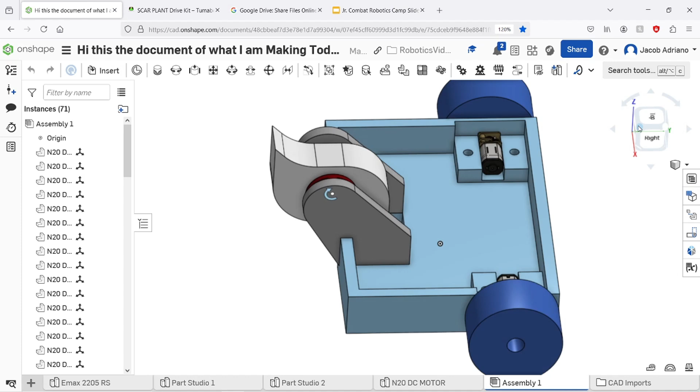Okay, welcome back. Now we are going to start making our front end. The reason why the front end is split up into a different video is because what you choose to put on the front of your robot can dictate a lot of stuff on how well it's going to fare against other robots. To demonstrate this, I'm going to pull up MS Paint.

Ooh, you're going to see a lot of really bad drawing by me today. But I'm going to show you like a little rock, paper, scissors chart, but for forks, wedges, horizontal spinners, and vertical spinners. So let's go draw that right now. We're going to see how badly I can draw stuff.

So, okay, this is wedges, verts. Okay, so typically when you run a vertical spinner, a lot of people just typically only run forks with them. This is for a couple reasons. When you have the forks, it helps you control the opponent, but also they're really good at getting under wedges.

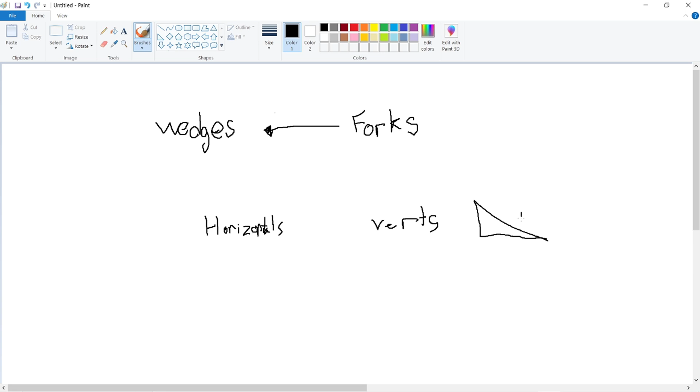So, forks beat wedges. I'm going to draw an arrow indicating that. Now, what are the wedges good for? The wedges are good for deflecting damage, not from a vertical spinner because that would hit them upwards, but for sideways hitting damage. So if you can imagine a wedge at an angle like this, a horizontal spinner came at them like this. This is like the bar of a horizontal spinner, if you can imagine that. This spinning bar will get deflected by this wedge. So the wedge is really good against horizontals.

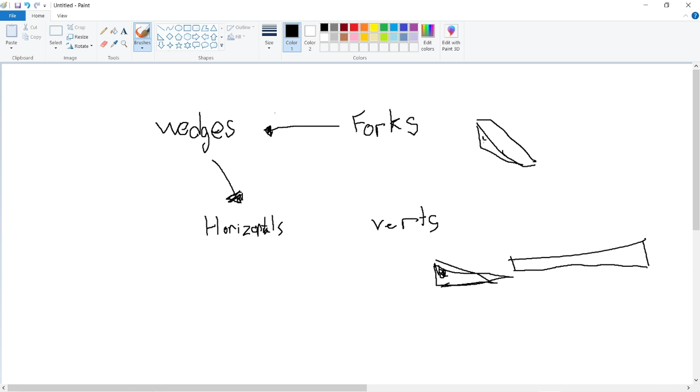So, but a horizontal spinner, if you can imagine that horizontal spinning bar again, do you know what is good against hitting? Forks, because they're dinky little, they're just little forks. That's all they are. They're pretty small, relatively thin, only mounted by like two little things on either side. The horizontal will smack the forks out of the way, so the horizontal is really good against forks.

You can see the vert is kind of kicked out of this triangle here, and I'll explain why. It's because the verts can run wedges or forks. Horizontals, people usually don't run either, not wedge nor forks. But a vert can put a lot of stuff in that front end. Let's say if you're running a vert with forks, you can be really good at beating robots with wedges on them, or other verts. If you're running a vert with a wedge, you can be really good at beating horizontals.

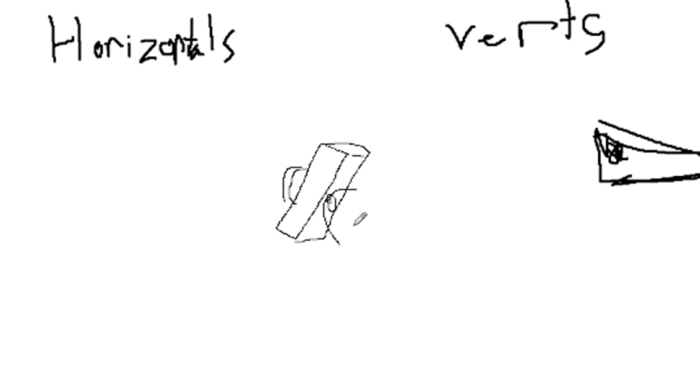So I like verts because it gives you that added layer of creativity to the weapon, because the weapon would be like in the front of the robot like this. You can imagine that's the vert. You can put whatever you want here. For example, you can put forks, or you can put a big wedge.

So it's pretty versatile. I'm gonna go over making a fixed front end. I don't know how much time it's gonna take to go over making a modular front end for the robot. But that is something I will go over in the future. But for this, just the basics, we're gonna go over a fixed front end.

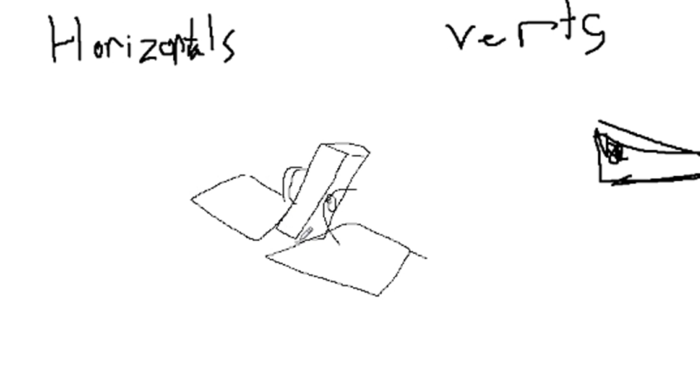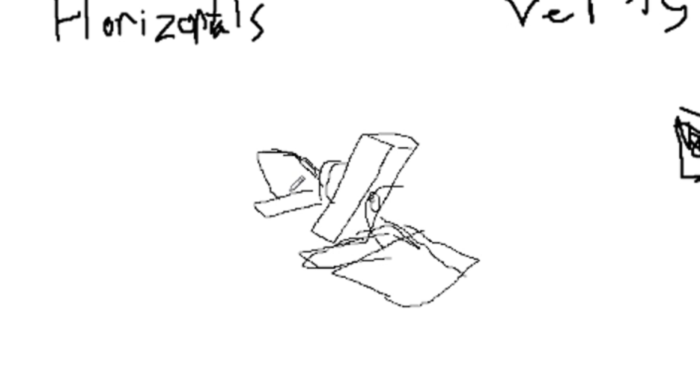And the front end will look something like, hold on. Okay, not exactly like this, but kind of a mix of both. If I were to run a fixed front end setup, where I can't replace it, I would run a mix of both with tiny forks in the front and then wedges that span out to the sides. And that's what I'm going to show how to do.

So, to go over that again, horizontals beat forks, forks beat wedges, wedges beat horizontals. Verts are good because since there's so much open space on the front of the robot, also where the weapon is, you can put forks on there too, and you can also put wedges on there. So it's kind of a modular thing, and you can choose what you want to do.

Little side tip though, if you're designing a horizontal, what some people are doing nowadays, and what I encourage more people who make horizontal spinners should do, is throw wedges on the back, throw forks on the back. Who's saying you can't put a front end on your horizontal? Just put it on the back. So yeah, I'm gonna go over that when we make a horizontal later in this video class, but that's at a later time.

So let's go make this vertical spinner. Okay, so let's start with the little wedge piece. In order to do that, let's head back to the Part Studio because that's where we actually edit everything. And then we're going to make a sketch on the side of this chassis. So we're going to click sketch, click the side here, and you see it pulls this up.

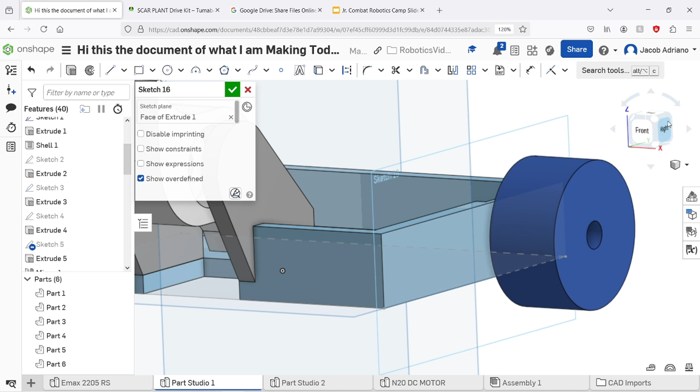Now, with this as a reference, we can start drawing out our wedge. So what should the wedge look like? I'm thinking it should stick out maybe 2 inches. Click and press 2.

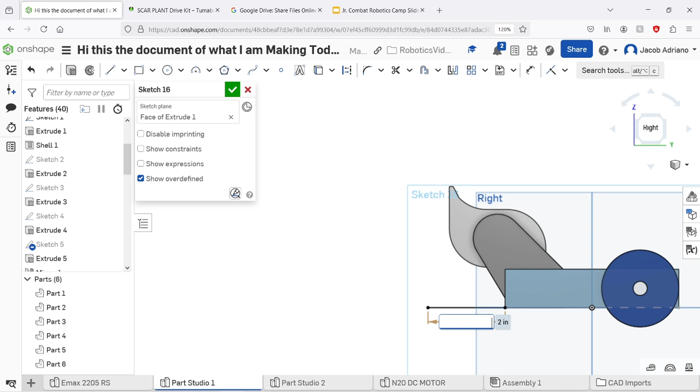Actually a little bit less. When I make my wedges, I don't like them sticking out too far. I like having the weapon stick out a little further. That's a little bit subjective, it's kind of up to you. I like having my weapon stick out more. It kind of guarantees I have a better impact when I hit the opponent, and I don't have to rely on getting the opponent over my wedge before I can hit them with the weapon. When I have the weapon sticking out more, it gives me a better chance of actually hitting them.

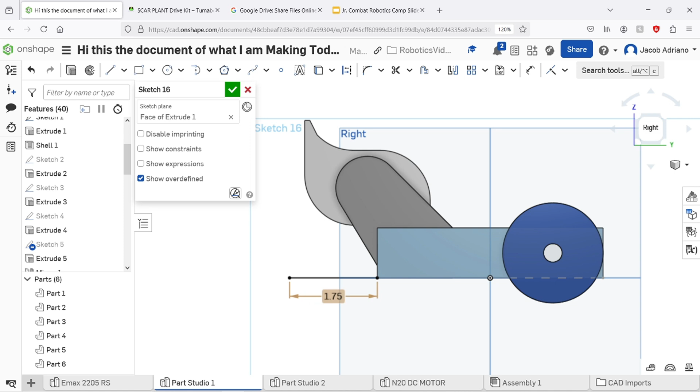So I'm gonna have my wedge only stick out, maybe 1.5 inches. Actually, even less. 1.25. Maybe less? No, 1.25 is good.

Okay, now that I have that, I'm just gonna complete the triangle so I have a rough idea of what the wedge would look like. Yeah, I'm not really liking that, so we're gonna go adjust that a little bit.

For this portion, it's partly by feel and partly by experience. All of the stuff that is more experience-wise, I'm gonna explain to you exactly why I'm doing it. All the stuff that isn't really experience, I'm not explaining what I'm doing, because you can do it yourself. Go ahead, have a little fun. It is your robot after all.

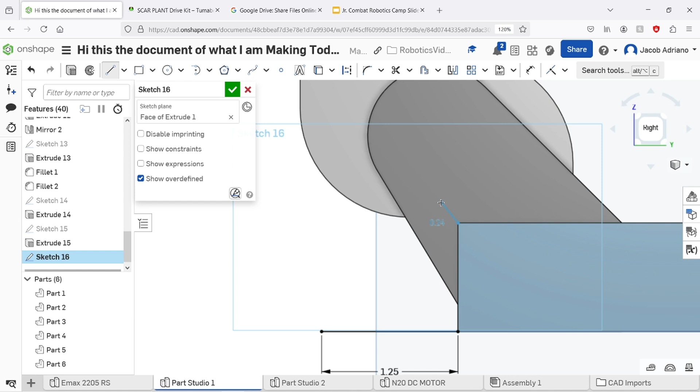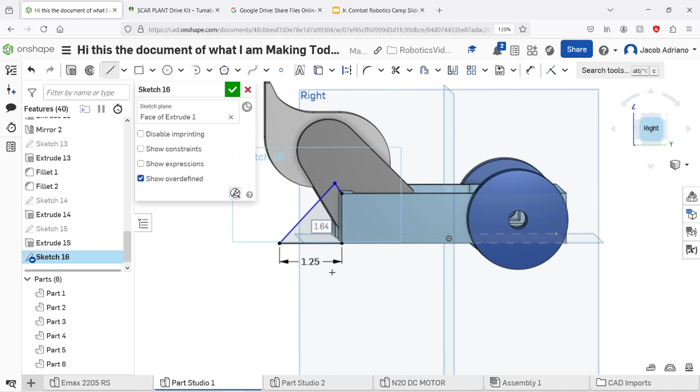So I am making this wedge a little bit higher than the actual chassis itself. There is an actual reason for that - it's because I don't want a horizontal spinner. Let's say a horizontal spinner comes and hits this weapon or hits the wedge. If it hits the wedge, there's a chance it could go right up the wedge and then go to the top plate. I don't want that, so I'm gonna make sure my wedge sticks up just ever so slightly so it doesn't ride up to the top of my robot.

I think that this is a decent enough shape. 0.3 inches at an angle that I don't remember, and then 1¼ inches out.

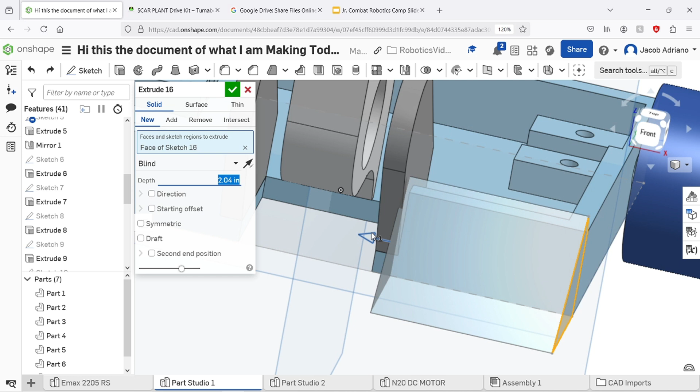So now that we have that, Shift E for extrude. I want it going this way, and then I want it to reach this end. I did it wrong. Hold on, I want it to go that far. That's 2 inches. Hit the check. There we go.

That's kind of a wedge thingy. Although I do believe that's a different part. I want that to be the same part. Merge scope, click part 1. There we go. That's the start of our little wedge.

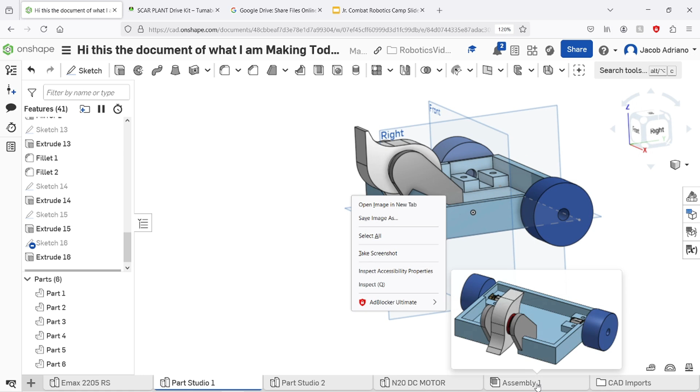Go back to the assembly so you can really see how the wedge would interact. Now that I'm seeing this, I think actually I can make the wedge stick out just a little bit farther.

So we can go back to edit sketch 16. And then I want to change this 1.25 to 1.5. Let's see how that changed the angle here. Did that even change? Oh, there it is.

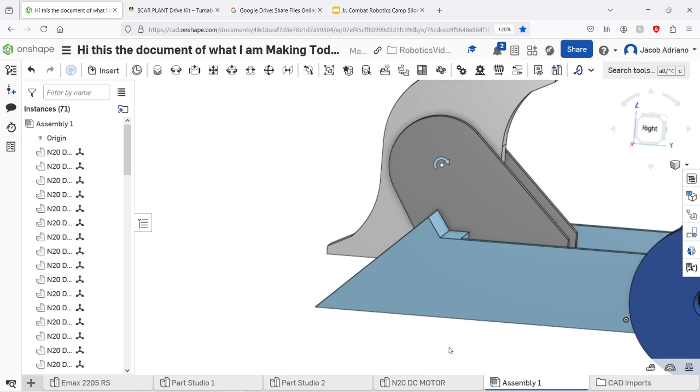I take it back, I think I'm thinking somewhere in the middle. So 1.35. Enter. That's better.

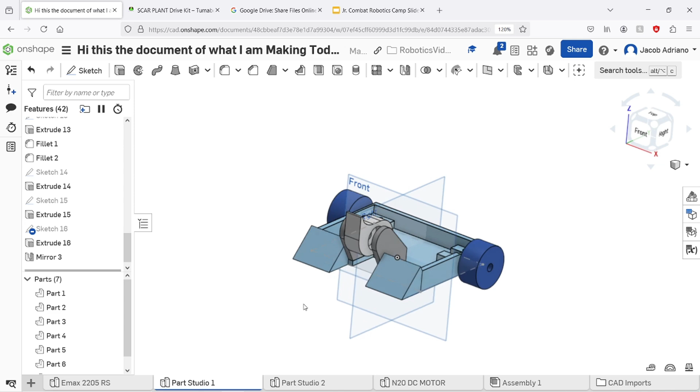Okay, now that we have that, let's go mirror that on the other side. Back to part Studio 1. Yes, this is good. And then let's go mirror this. So mirror, entities to mirror - we can just click the whole body, mirror plane, click the right one. There we go. This is pretty close to done already.

You can see this video won't be too long. Well, at least won't be the hour-long video that the last one was. So...

Yeah, now that we have some wedges, this looks pretty cool. We're gonna add some tiny forks now.

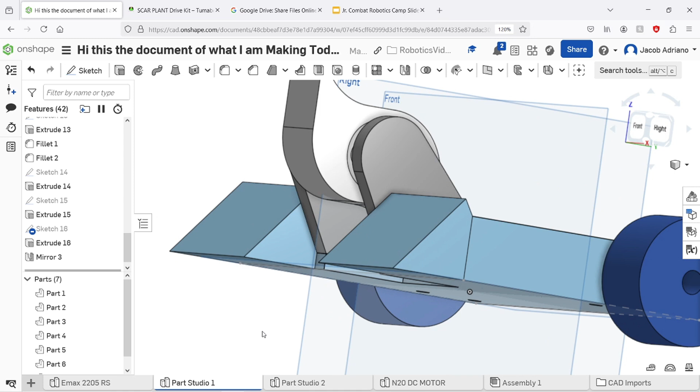Okay, so for the forks, there's two different forks you can make: fixed forks, which are forks that are fixed in place and can't move, or forks that can pivot, so movable forks.

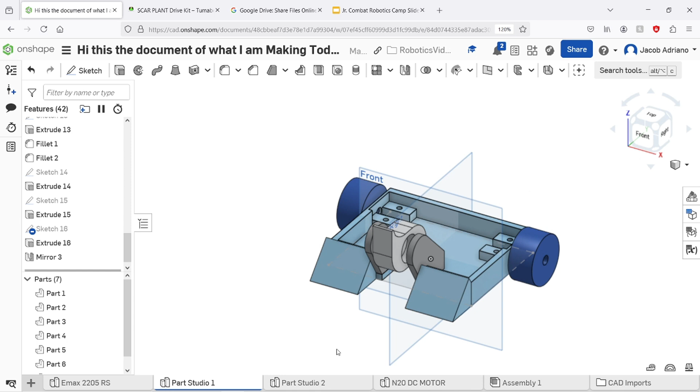Forks that can pivot are good because let's say a robot gets tilted up a little bit. Let's say my robot on an impact gets tilted like this, or I'm tilted forward like this. My forks will still be touching the ground because gravity keeps them pushing down. If the forks were fixed at an angle and my robot gets tilted like this, my forks will start pointing up because they're fixed in that position.

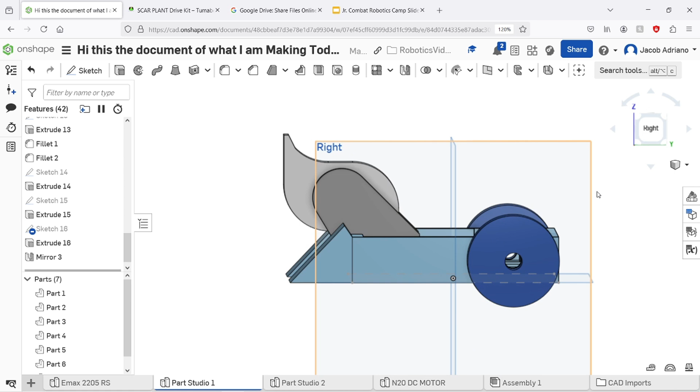That being said, fixed forks aren't always horrible. For two-wheel drive robots, you can ensure that one of the places that your robot is driving on is your forks, because obviously, with a robot like this, it's not going to balance perfectly. It's going to be at a bit of an angle when it's actually on the floor, if you can imagine that.

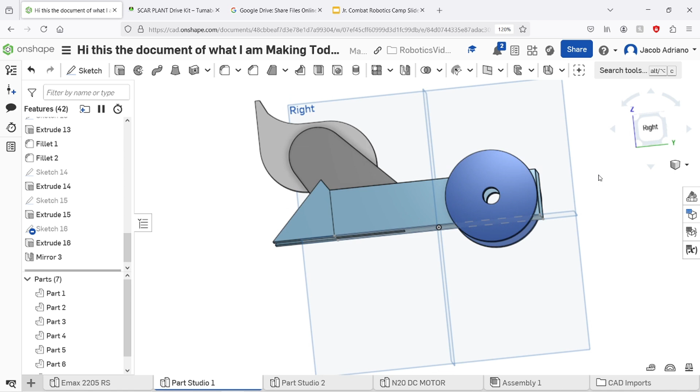It would touch, kind of like this. I can't get the angle perfect, but okay. It would touch here on the wheels, and then it would touch right here on the edge of this wedge. What you want it to be touching is on the forks, because you want your forks to be scraping the ground almost all the time, pretty much.

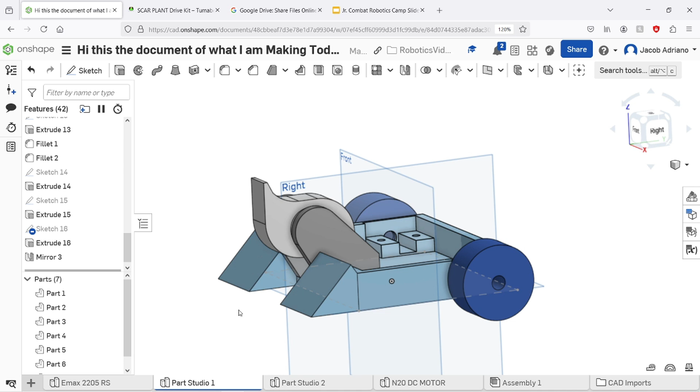So fixed forks aren't always bad. For two-wheel drive robots, you can make sure that it balances on your forks. That's how you ensure your forks always stay low to the ground. So we're going to make fixed forks for this robot.

And for these forks, we're going to have them mounted onto the uprights. So we're going to find where the uprights are. Extrude 2. Okay, we're going to go edit the sketch that your uprights are made on, and we're going to modify this so we can put some forks.

So where should we start? I'm thinking forks should go down like this and then go out farther than the wedges, so maybe 2 inches. 1.75 actually, 2 inches is a little much.

I like my forks, at least for this robot specifically—I don't want them to stick out too much because in plastic ant weights, the forks can snap pretty easily. So I don't like having forks that stick out too far. When I do run forks, they're either really thick or don't stick out too far to make sure they don't get damaged. For this robot, I just don't want them to stick out too far because I don't think I have enough room to make them thick enough.

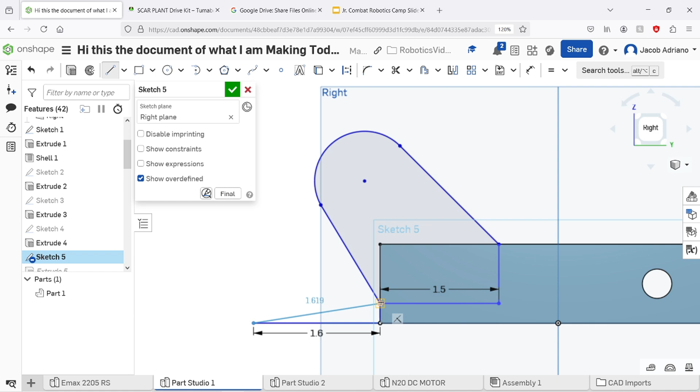1.6. And then from here, I'm going to add the fork angle. I'm going to do the angle by eye. I'm thinking... actually, I need to figure out where it stops first.

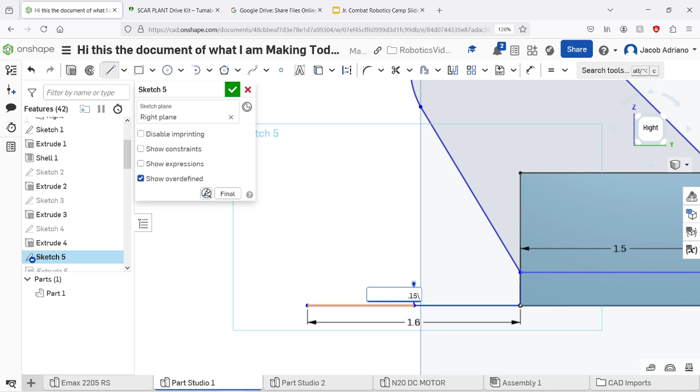I'm thinking right here in the middle of this 1.6, and then .15 going up from the center. Click here, you can see how that makes a triangle. I think that looks fine for the forks.

So with that being done, we can add a tangent point arc. Just go here, connect it here, click the check. Boom, that is our little fork. So let's go extrude it. Hit the check. There we go.

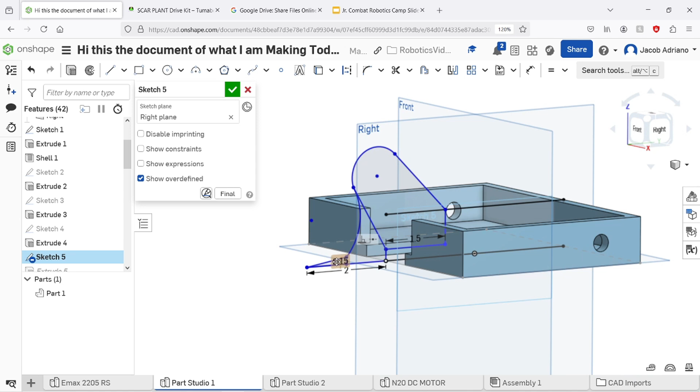Now you can see how that adds little forks, and we can make those a little longer. I think I didn't do enough, so 1.6—we're gonna do maybe 2, that's fine. And then I'm thinking that these forks are way too thin right now, so I'm gonna change this actually to 1.8.

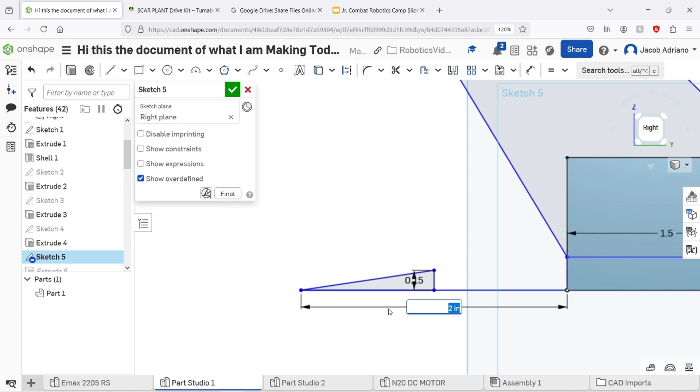And then change this—oh, stuff moved. Delete this. There we go. Now it changes to 1.8. So now we have this. This is pretty much almost done. Doesn't that look cool? That looks pretty dope if I do say so myself.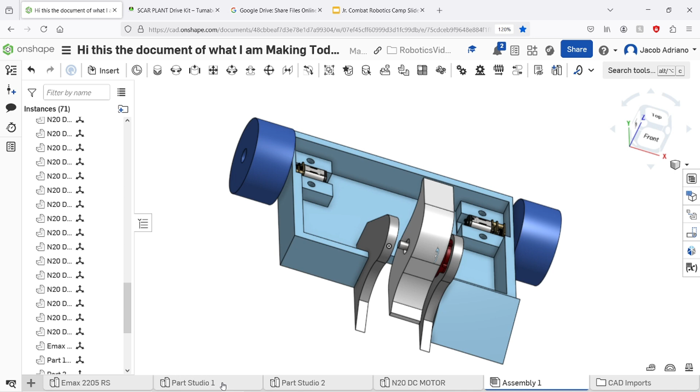We're gonna add a few final touches. Oh, interesting how this didn't copy over. Weird. Oh, because this is a different part. Make sure when you do your mirror, you set it to add instead of new. Merge scope, connect it with this. There we go, there we go.

Alright, we're going to add a couple more things. First of all, these wheels are pretty exposed. I'm going to make sure they don't get clipped as easily. In order to do that, we're gonna head back to Part Studio 1, and we're gonna go back to this sketch 16. We're gonna make some wheel guards.

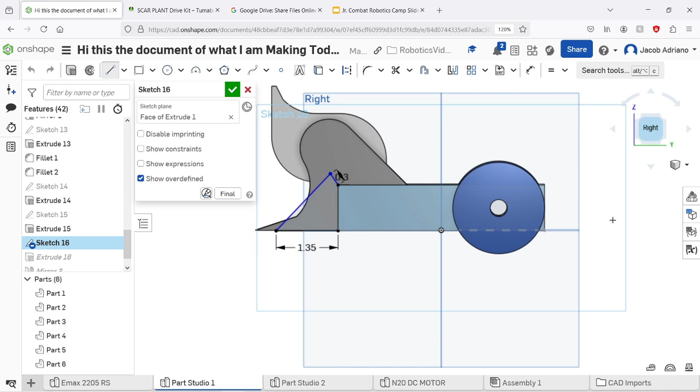Not wheel guards that go all the way around the wheel. I find that casing the wheel entirely, that's fine, but it can cause some other issues, just like, let's say, with maintenance—they often get snapped off pretty easily. I like having wheel guards to protect just the front of the wheel. So if you can imagine from a top view, kind of like a triangle like this.

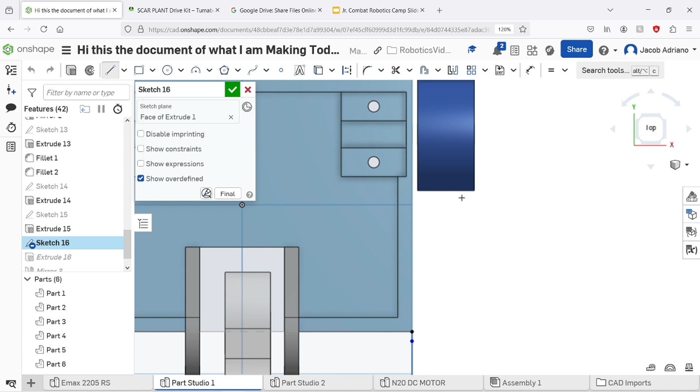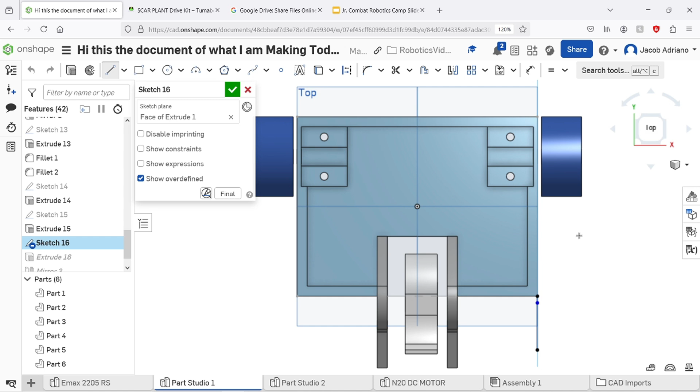Why do I not protect the entire wheel? I noticed that when I protect the entire wheel, this side part gets broken a lot, and I have to replace it a lot. It's often just extra spots for horizontals to hit instead of actually protecting anything. For me, this is totally personal preference. If you're not so great at driving or you're just new, I recommend encasing your entire wheel.

I'm not too bad at driving, I'd say. I'm pretty good at keeping the front of my robot facing the opponent, so I don't protect my wheels too much. But that's all personal preference - if you want to protect your wheels, go ahead and design that. I'm going to design some front wheel guards.

To start, I'm going to make some lines sticking out 2.25 inches on either side, which is also this midpoint. Then I'm going to use the 3-point arc tool, go from top to bottom, and make a little arc, kind of like this, at 0.8.

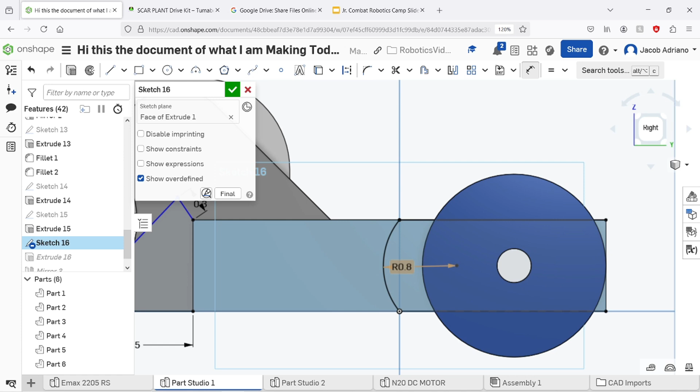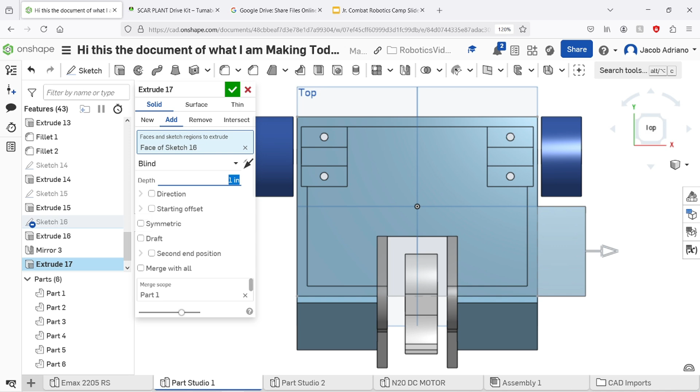From there we can extrude this whole thing. We're going to select this little rectangle, the part we traced out, Shift E for extrude. Now you can kind of see what we're doing here. Drag this out - I'm thinking 1.2. No, just 1 inch. Yeah, that's good.

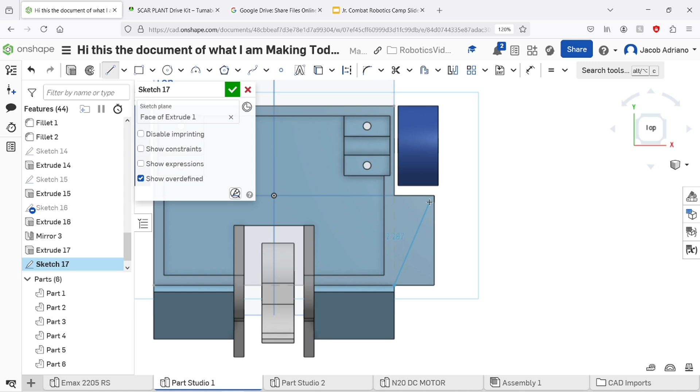This is just a box right now, but we're going to modify it. I'm thinking we'll add a sketch on top and trim it out, like negative space, like we're carving. So I'm going to add a line cutting this rectangle in half, then use Shift E for extrude, click remove, and remove all of that. Hit the check, there we go.

Now we just copy this over again - mirror, click the whole thing, make sure it's add instead of new. Mirror plane, hit the right plane, merge scope, click the chassis, hit the check. There we go, that is our armor in the front end.

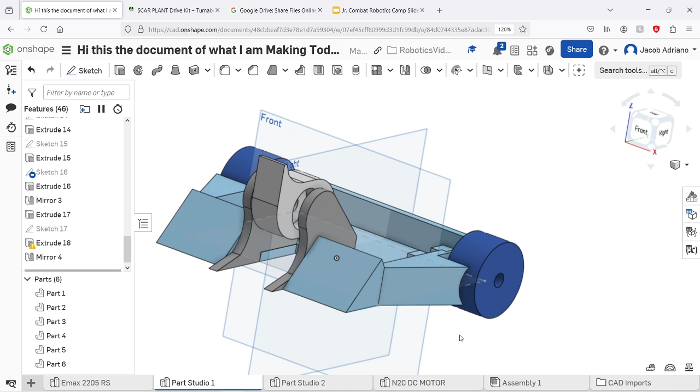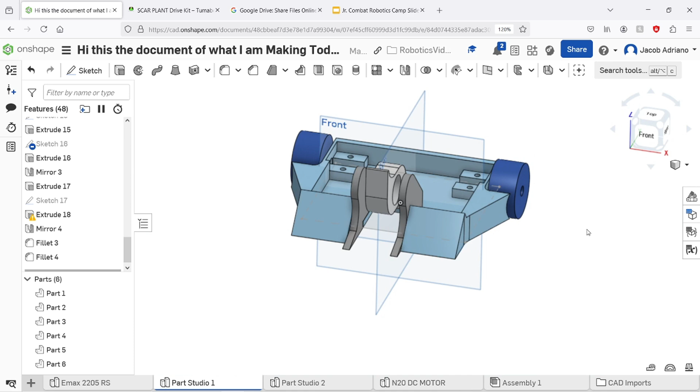I'm going to smooth it out a little bit with some fillets and stuff. Okay, so I just added a couple fillets here and here, and then I added some in the back as well. This is looking pretty good.

So we're almost done, but it is missing a few things that are pretty important for a robot - one of which is a top plate, and the other are mounting screws. We're going to go over that right now.

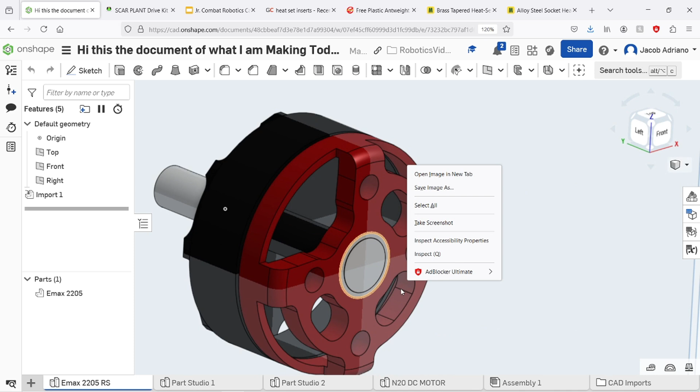Let's go add stuff to this robot so we can actually mount things to it. Let's start with the screws that will mount into the weapon motor. As you can see, there's nothing to hold this weapon motor on, but if we go to the weapon motor CAD, we can see 4 screw holes we need to make. Also, this little sensor needs a hole because the silver part actually spins and we don't want it interfering, so we're going to make a little hole here too.

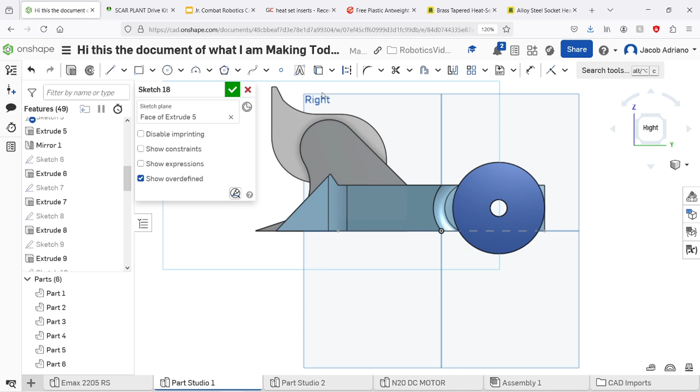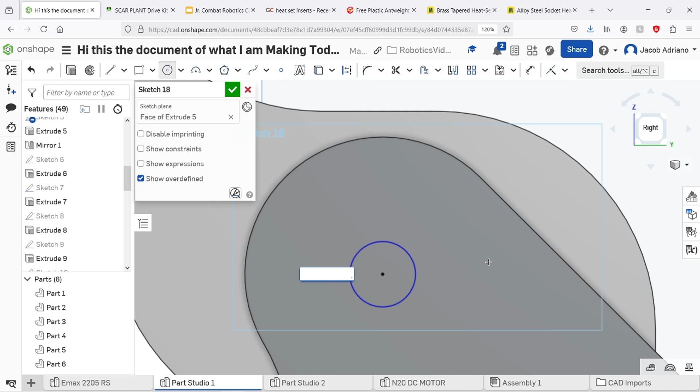Let's go to the CAD. Let's hit a sketch, and click this face right here because that's where the holes will be. Zoom in - actually we don't need to project this because it should already pop up. If you highlight around the middle of this circle, there should be an invisible dot. You can click it and make a circle. We're going to make it 0.25 inches big - actually, 0.2.

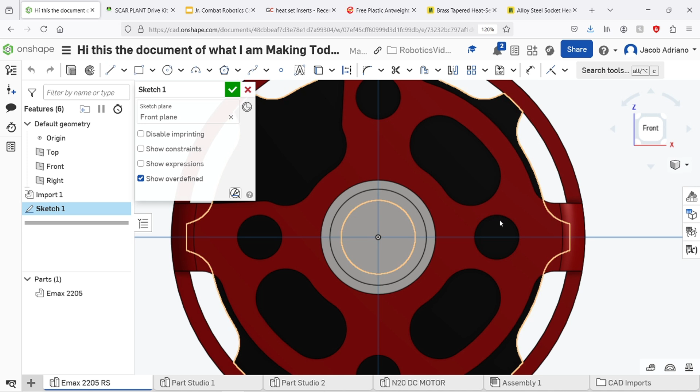Now, to know where the rest of the circles go for the mounting, let's look at this CAD. As you can see, we can see the 4 holes and measure exactly how far they are. Let's imagine taking a line - click sketch, click this face, and use a line tool to measure the whole distance of everything. For example, from the center to this hole, I'll have to project to this - actually, from the center to this hole is 0.315 inches. So over here I can make a line that goes 0.315 inches, and I know there's going to be a hole over here. Wrong tab - let's go back and check it for all the other sides.

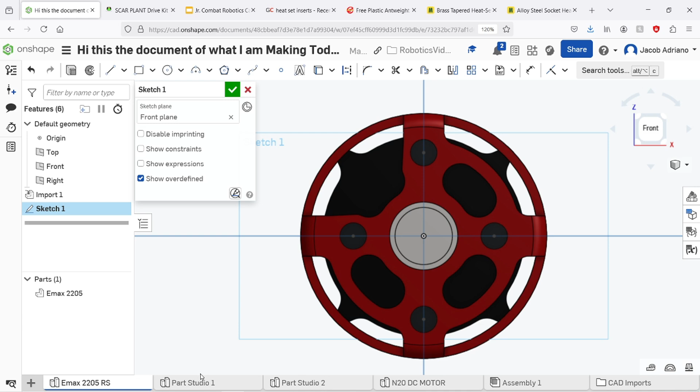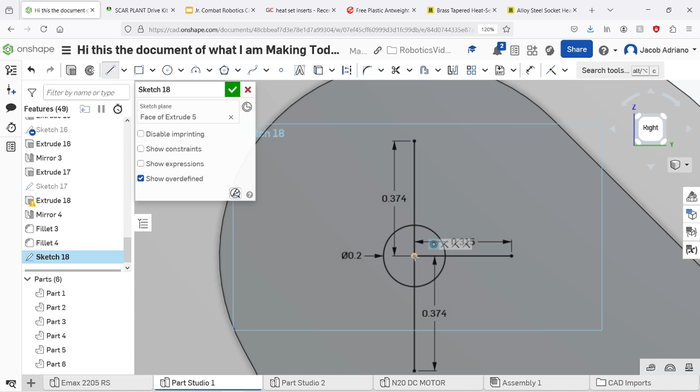First, let's project these circles so I can actually see them. There we go. This one is also 0.315. This is 0.374, and this one is also 0.374. So up and down we're going to use 0.374, 0.374, 0.374, and then left and right we're going to use 0.315, 0.315. Good, now we can just add the holes.

They can be like 3 millimeters. So type 3 mm, or 0.118 if you want to use imperial.

There, now we should have 4 holes like this. Looking back, this hole could actually be larger. Never mind, 0.2 is okay. Now we can extrude all of these. Change it to remove because we want to remove stuff, and yeah, looks good.

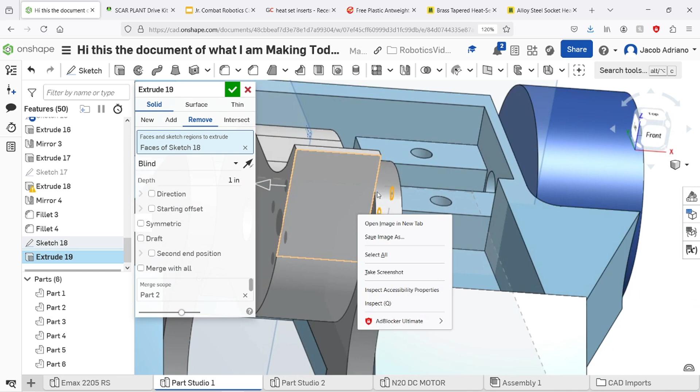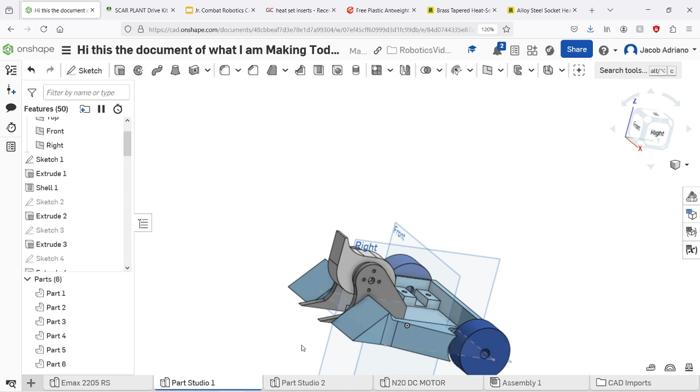So now we have that. Perfect. A few more things need holes though. For example, the top plates will need some holes. It also doesn't even have a top plate, so we're gonna have to add that after as well. And then these uprights will also need holes. So let's start with the top plate holes, or soon to be top plate holes.

So let's click the top of the robot, get a top view, and then we're gonna zoom in right here. You see these 4 corners? Well, we can't use these 4 corners because they are being occupied by the motor mounts. So we're gonna use the center instead. Click with a circle, and then we're gonna drag it out to the edge of the wall.

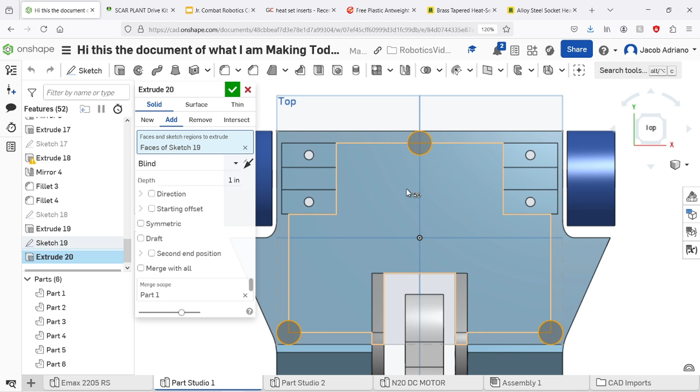I should make a ½ inch circle in the back. Over here, these circles will be, oh yeah, also ½ inch. Perfect. And then we can extrude those going down. Hit the check. Perfect. Now these will be the little spots where we can add our mounting.

Now for this robot, we are going to use something called heat set inserts. They look like this. You heat them up with a soldering iron or something else hot, and you push them in. If you don't have access to a soldering iron or something, you can use plastic screws, which are screws that form themselves into the plastic.

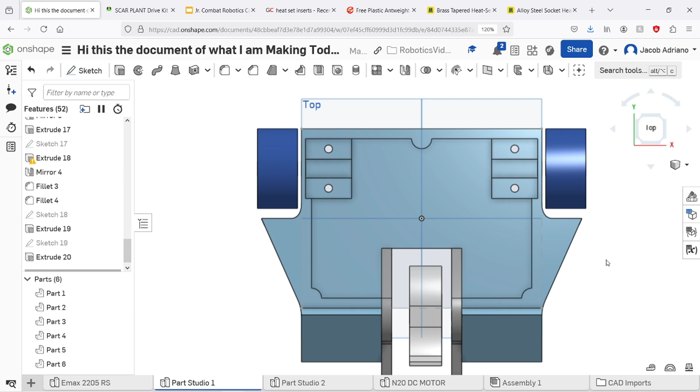I don't recommend them because after a while, those screws tend to just chew up the plastic, and in the long run, they don't hold. I like the heat set inserts because they have nice brass threads for the screws to tap into. They seem to hold better for me, although, I mean, if you don't have a soldering iron or something hot like that, what are you gonna do?

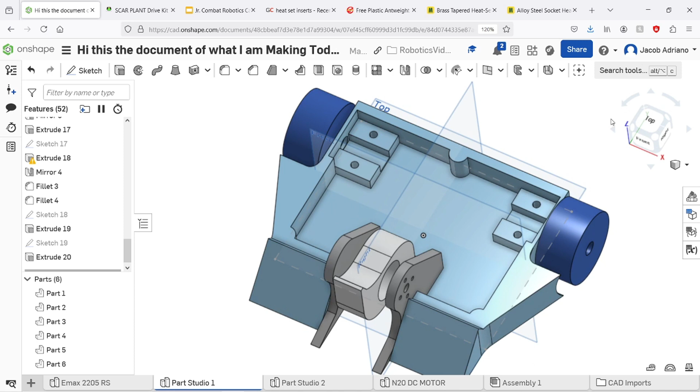Now, these heat set inserts are about 5 millimeters in width. About 5 millimeters. So we're gonna head to our CAD, go back to sketch 19, and then we're gonna make holes here that are 4.5 millimeters.

Now, why not 5 millimeters? We're not doing 5 millimeters because we need the grooves here to actually lock into something. It's nice to spec the holes a tiny bit smaller because it allows the heat set insert to really grab into the side of the wall. So instead of 5 millimeters, like the CAD says, we're going to do 4.5.

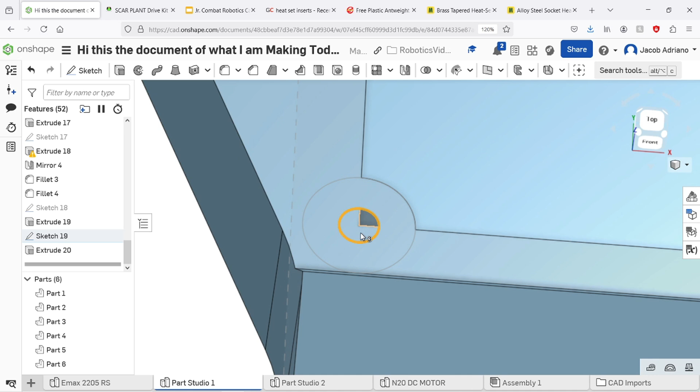Now that we have all 3 holes, we're going to press Shift E, and then we're going to select the holes that we made. Oops, what did I select? We're going to select all of these holes, and then we're going to press Shift E. There we go. From here, we can press Remove.

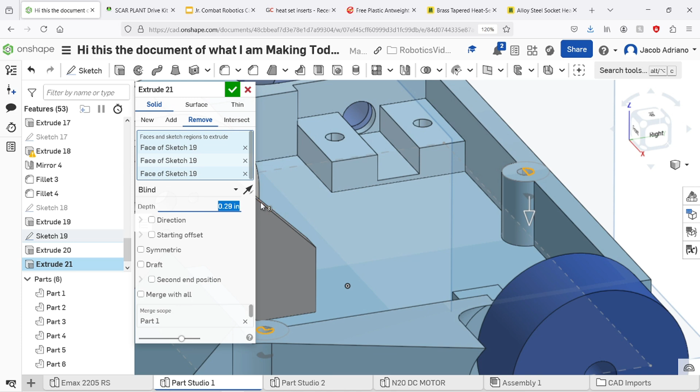And then we're going to carve out how much material. How much material are we going to carve out? Well, if we go to the CAD, we can see it's about 4 millimeters deep. But we also have to consider that the screw might go in a little more. So let's give it, let's say, 6 millimeters.

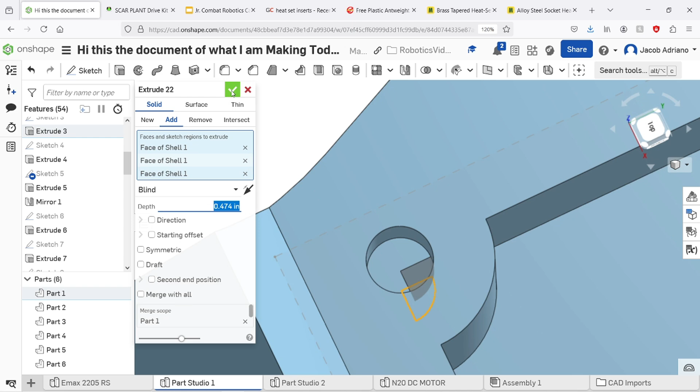Good. Now, as you can see, if we had this sketch, there's 2 different heights in there, so we're going to fix that with another extrude. Okay, so now they're the same height. I have a little artifact line. We're going to ignore that.

I had to extrude them 0.474 inches upward. Now we have top plate screws. There's one more thing we need to add now, and that is screws for the bottom of these uprights.

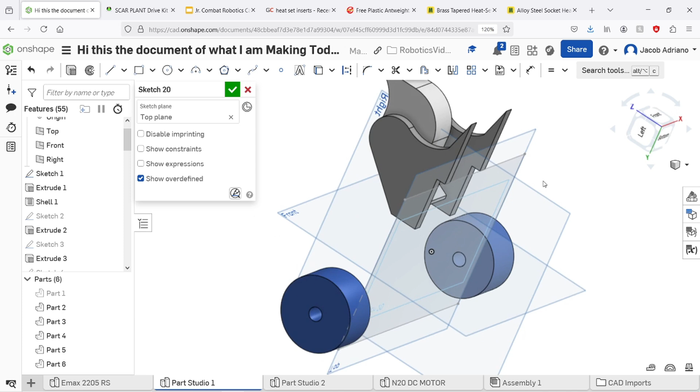For the upright screws, we're going to start by hiding the chassis. So part 1, we're going to hide it. And then we're going to make holes. Let's go click the sketch, and let's click the bottom plane. Or I guess top plane, but we're going to click the top plane. And then we're going to project, or U, all of these lines here. There we go. So now we have a bunch of lines of the uprights that we can use.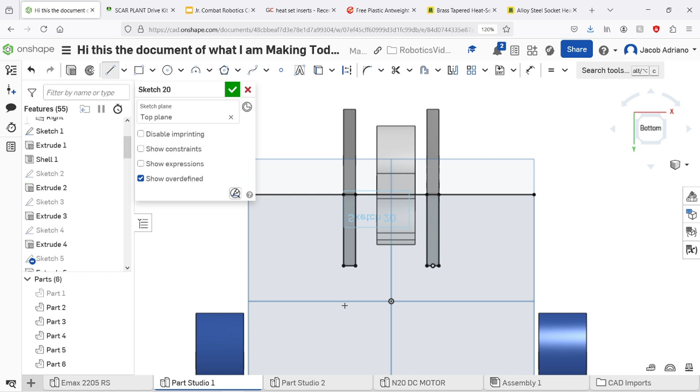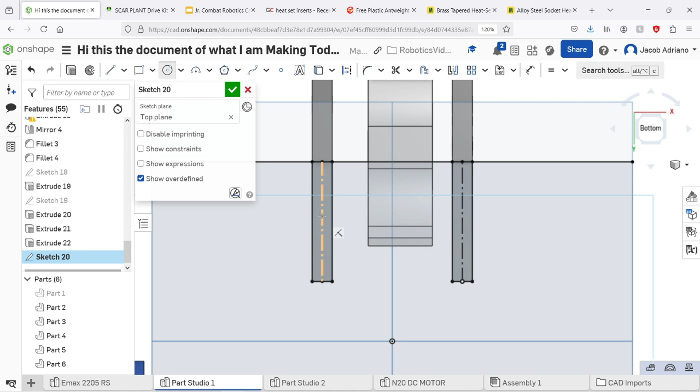So we're going to make one big line through the center of each upright, and these will be our guidelines. So we can change them to construction lines. Okay, now we gotta just put some screw holes. So I'm thinking we're gonna have 3 screw holes per upright. That sounds fine. Let's go to the midpoint of this upright, and then it's the same process.

So what was the size? 4.5 millimeters. Good. Now we're just gonna need to add more. So I'm thinking what looks about right. 0.45. 0.45 inches up from the center. I'm thinking another screw would be good over there.

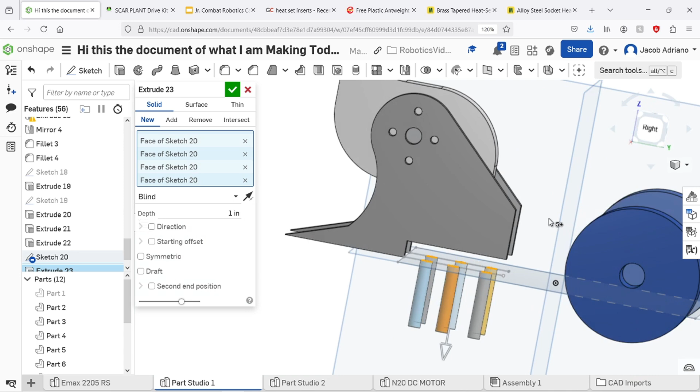And then we just repeat the same thing going down. Now that that's done, we can extrude these. Sorry, I had a little struggle selecting the holes that I wanted to actually extrude, but now that I have them selected, we're going to click remove. And then we're going to drag it up, let's say 0.75 inches. Merge scope.

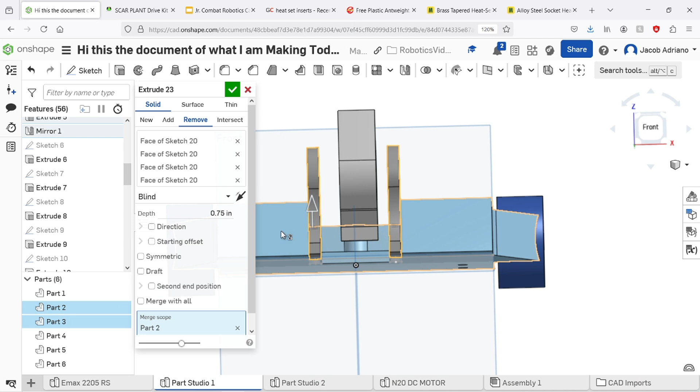For merge scope, we want it to merge with just these 2 parts. Actually, I lied, we're going to have it merge with part 1 as well, and I'll show you why. Now let's click the check. And there we go. The reason why we had to go through everything is because it makes holes for everything. One extrude does the pathing for both these holes, therefore we have a path for the screws to go, along with a place for the inserts to go.

Now from here, let's go make our top plate. The top plate will be easy. If we click a sketch on the top, and then from the top sketch, all we are going to do is outline the top, just trace it out everything. I saved these little curved bits for last.

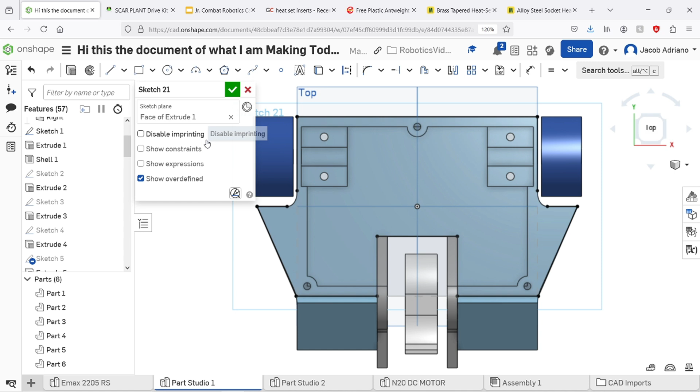You can also press project and project them as well. That's good if you have like really funky lines with your CAD. Something else we also want to keep are these screw holes.

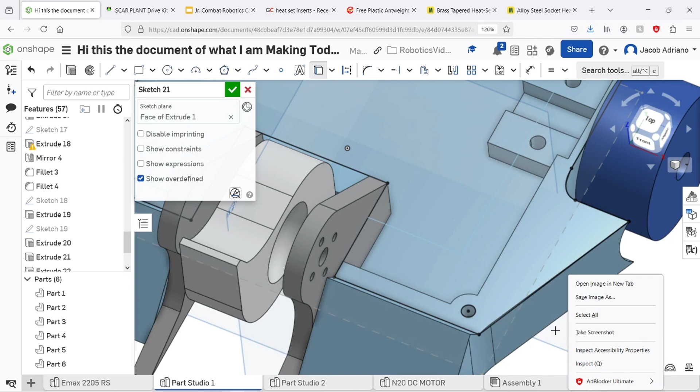Okay, now that we have that, let's go press Shift E. Oops, I made a revolve as well. Let's delete the revolve. Go to this, press Shift E. There we go. Now you can see where our top plate's going to kind of pop out.

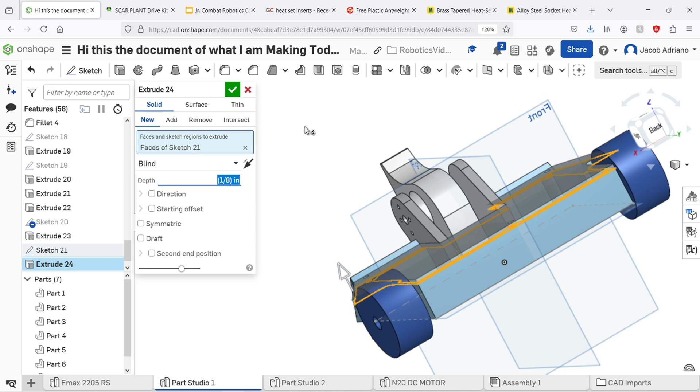But obviously you don't want to be an inch. I'm thinking 1/8 inch. How's that? Hit the check. That's perfect, so 0.125 or 1/8 inches.

There we have it, this is looking like a pretty complete robot. Now this is looking pretty complete. There's a couple things I want to adjust. For example, this upright here isn't really doing anything. I'm probably going to move this all inward, so you can imagine this upright can support this other arm of the motor. But besides that, this is looking pretty complete.

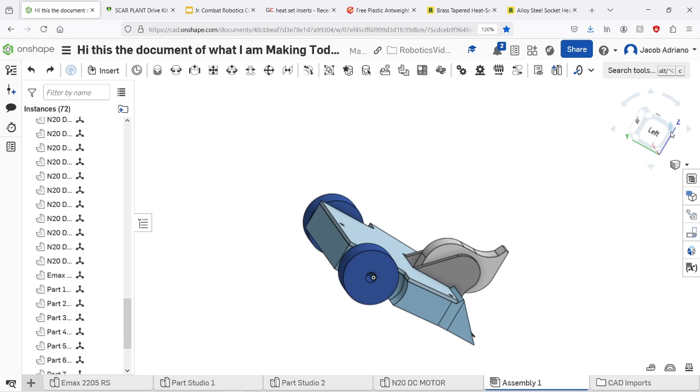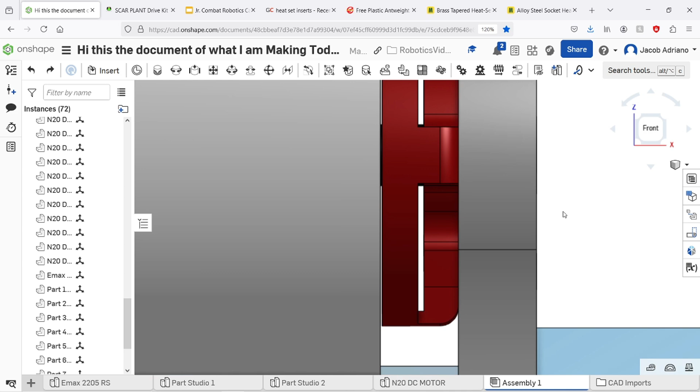If you've made it this far and didn't customize it at all, you kind of focused on exactly what I was doing, I recommend you just kind of go crazy with it. This is pretty much the end of what I have to show you for the vertical spinner. It's not completely done yet, obviously. Like I said, I have to move this inward. There's a couple other things that I didn't add, and that was on purpose.

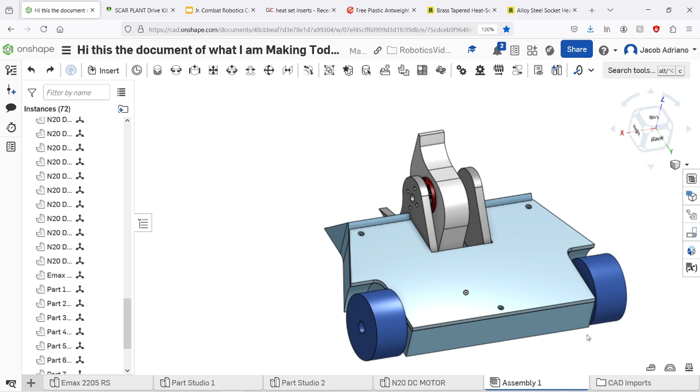For example, this robot needs a hole for the power switch and the safety light. The safety light I could have added, to be honest, but some people want their safety light in a different place. For the power switch, however, there's a lot of different ways people power on the robot. They have their FingerTech switch, which is like that little screw switch, so you need a hole on the top of the robot. I know some Viper kits come with that little plug-in switch where it has that little audio cable, and you plug it in and take it off to start the robot.

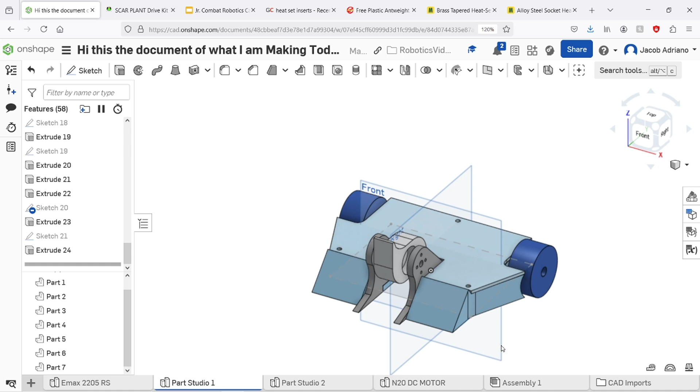Depending on what style of switch you have, the hole might be in different places, but I trust you guys that you can put a hole in the CAD to show exactly where your robot will turn on and off, as long as you follow this tutorial. I think you guys will be well versed enough in CAD to be able to do those things. So I encourage you to kind of go crazy with the CAD, mess around with it.

Because we are officially complete. Congratulations. Come back in the next video and we are going to show you how to make a horizontal spinner. Horizontal spinners are awesome because while they are a little bit tricky to drive, they pack a real serious punch, and that is what a lot of people love to see off of the sport.

And I'm going to show you how to make a horizontal spinner that packs the most punch, and also a horizontal spinner that kind of flips the script. A horizontal spinner that can drive really well, doesn't hit super hard, but you can be very precise with it. And that is something not a lot of people do, and I will show you how to do it in the next series of videos. So come back and I will show you exactly how to do that.